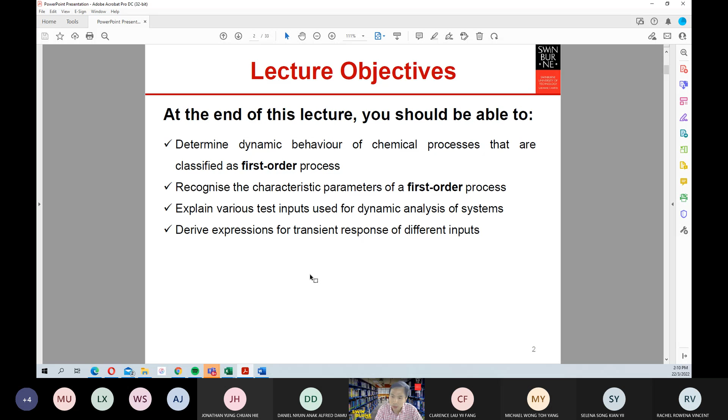We will also overview the various test inputs that are used for the dynamic analysis of the systems. And then we will also derive the expression for the transient response of different inputs.

So a first order system is a process whose output is modeled by a first order differential equation. Imagine you have a process, you have an input, and the input here is a function in terms of the change with time - it varies with time, that's why we label it as f(t). The output here is y(t), because we discussed in the last week about the single input, single output as well.

Now let the dynamic model of this process be represented by a first order ODE given below in the deviation variable form. Why do we use a deviation variable? Because if we use a deviation variable, it will make our life easy, since at time t equals 0, the deviations will be 0 - because we assume that at time t equals 0, the value of the variable of interest will be at steady state.

Okay, so in here you see in equation 1, we can break down into two cases: where a naught is equal to 0 and where a naught is not equal to 0. So let's say for the first one, a naught is not equal to 0, what will we do in here? What we do is we can rearrange. When we rearrange, this constant in here can be taken as equal to the time constant of the process, whereas this one will be equal to the steady state gain.

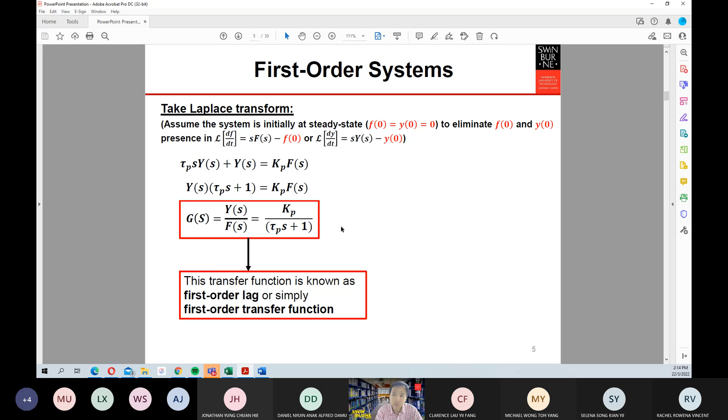For the second case, when a naught is equal to 0, that will be simple, because once you set this thing equal to 0, then you will only have this term and this term in here. That means these things can be represented physically in terms of the steady state gain. Then you can solve it again in a similar way. You can use a Laplace transform, and you will get another transfer function. So the transfer function that you have for the case of a naught not equal to 0 is different from the transfer function when a naught is equal to 0.

Now we go into the example. So if we have these things in here, we want to infer what is the process gain and the time constant of the process. So you want to make this in terms of this form in here. So you need to divide the numerator and the denominator by 4. So here you have this equal to this term in here. So you know that your Kp is equal to minus 0.5 and your time constant is equal to 5.5.

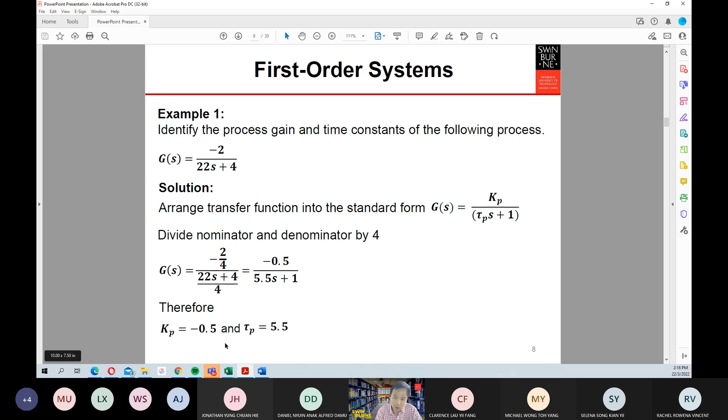Okay, so this one is just an easy example. If we have this kind of transfer function, and we want to know what the steady state gain is, and what the time constant is for that particular first order process, then we need to equate this form with respect to this form to get the value of the steady state gain and the value of the time constant.

Now, more importantly, in chemical engineering, process control is not something that is new. Process control has been developed since 1980, so it's about 30 or 40 years. So everything that people know about process control has been established.

Okay, so the reason that we go into this first order process is because we want to look back into which chemical engineering processes belong to the first order process, so that we know how to relate all the models that we develop in here, and what the characteristic nature of that is. Is it a self-controlling process, or do we need additional control systems to regulate the first order systems? So for the first order system, there are two important characteristics.

The first important characteristic is the capacity to store material, energy, or momentum. And then we also have the resistance associated with the flow of mass, energy, or momentum in reaching the capacity.

So the examples here are the dynamic response of the tanks. If that is a liquid storage tank, it will have the capacity to store liquids or also gases. The resistance, on the other hand, is associated with the pump, valve, weirs, pipes that are attached to the inflow or outflow of the liquids or gases.

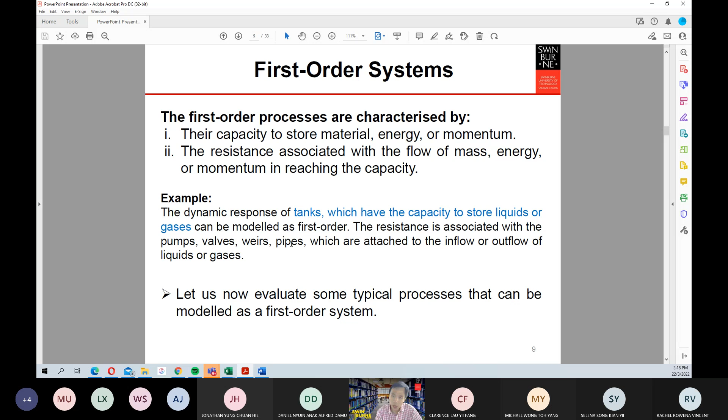At this particular point, it may not be clear to you yet what I meant, so that's why we have to go into the example to explain the significance of this. In this particular example, we are dealing with the mass storage tank with the capacity for mass storage. So you see this kind of systems.

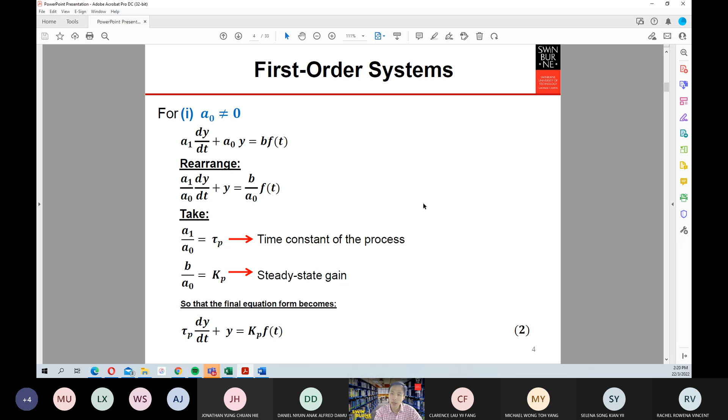...you can define this A/R is equal to the time constant of the process, and the Kp is equal to R. This is with regard to these derivations that we deal with the problem where A naught is not equal to 0. So basically you convert this A1 divided by A0, which in this case is basically A R, and this B divided by A naught into the steady state gain. So it's just going back into inspections of your mathematical form.

If you take a Laplace transform, you will be able to get this typical form again, the same form here, with the special note that your Kp here is equal to R, and your time constant, which is the tau p here, is equal to AR.

Then, the thing that you can do by inspecting your equations is that the cross-sectional area here is a measure of the capacity to store the mass. Why? Because the larger the cross-section of your tank, the more liquid you can store within your tank. And since your time constant of the process is A multiplied by R, we can say that the time constant here has a relationship in terms of the storage capacity multiplied by the resistance to flow.

This is basically more important than deriving all these things: that you take some time, you reflect back on the mathematical model, you check back how you connect those mathematical models in terms of the physical significance. So it's very important that you look back into the physics of the system. That's why when we go into chemical engineering, we are dealing a lot with mathematical and physical concepts. We only use a superficial concept of chemistry in chemical engineering, actually.

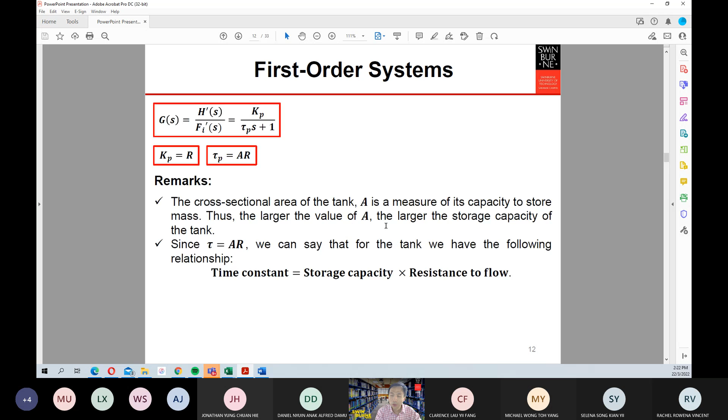The first example we just discussed was about liquid storage. Now we are talking about energy storage. Let's imagine we have this kind of tank. The liquid in the tank is heated by saturated steam, which flows through a coil immersed in the liquid, so there is heat transfer between the coil and the liquid. This tank is also a stirred tank.

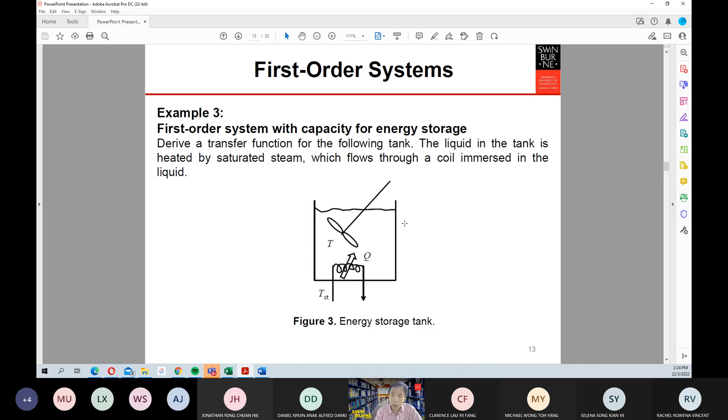And then the heat provided by the coil here can be given in terms of these things, and then TST here defines the temperature of the steam. This is basically the overall heat transfer coefficient, and the area of the heat transfer is AT here. So if we derive these things, we can get these equations.

Now we take the value at steady state. We change this value of T into the steady state value. This TS, TST becomes TST at steady state, T becomes T at steady state. This subtracted by this, we get these deviation variables. Then we move these two terms into the denominator of this term, and then we move this into the left hand side.

Then we define the two variables. These things here will be equal to the time constant of the process, and then we can also find out that Kp will be equal to 1.

Next, what we did is we take a Laplace transform. Then we know that we can also infer again the case where our time constant will be equal to density multiplied by the volume multiplied by the heat capacity at constant pressure, divided by the overall heat transfer coefficient multiplied by the area of heat transfer, whereas Kp will be equal to 1.

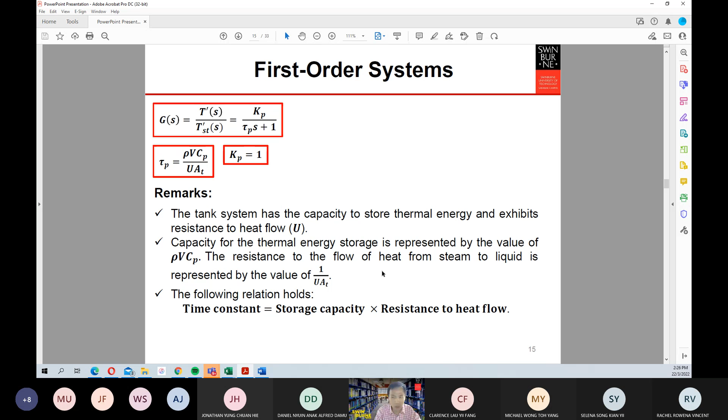The previous cases that we dealt with were dealing with the case where A naught is not equal to 0. Now, the next example, we'll talk about the pure capacitive system.

Instead of the thing we discussed earlier, we derive example 2 with one difference. The effluent flow rate is determined by a constant displacement pump, meaning the flow rate here is constant because we can adjust the flow rate using a pump. So no matter the conditions, we can define the flow rate of the pump to be constant. The flow rate taken out of this tank is constant because it's determined by the pump.

So if we take these things, the mass balance gives us this. You can see that at steady state, this H will be HS, Fi will be Fis, but Fo will be constant because we use a pump here, meaning there should be no variations in terms of the flow rate.

Therefore, if you use a deviation variable, this minus this will be equal to 0. Minus this plus this equals 0. So you have these things, which you can define as Kp. Kp is equal to 1 over A. Then you get dH over dt equals Kp Fi.

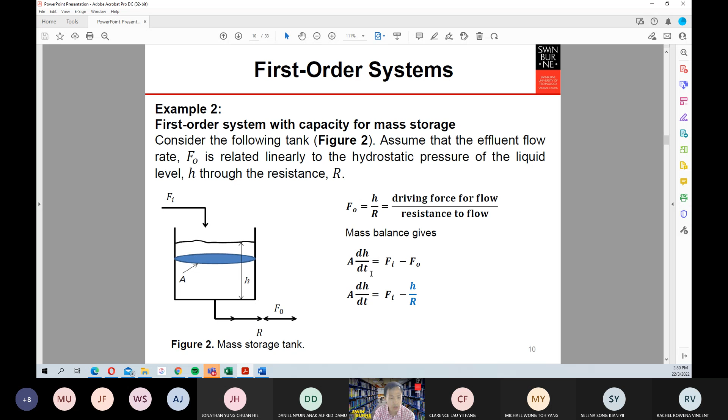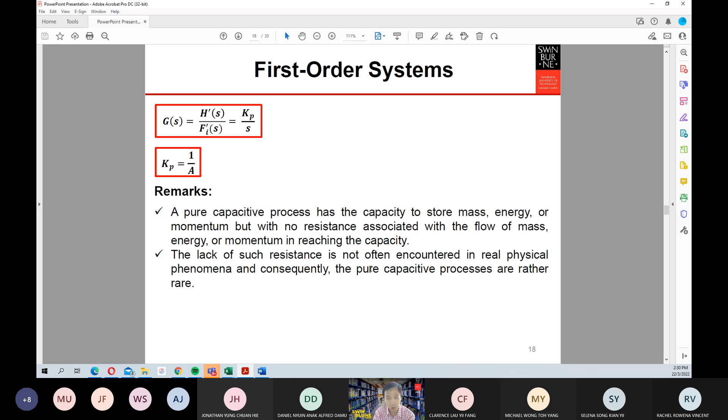So we will have consequences with the pure capacitive process in terms of the control that we will discuss in the following slides.

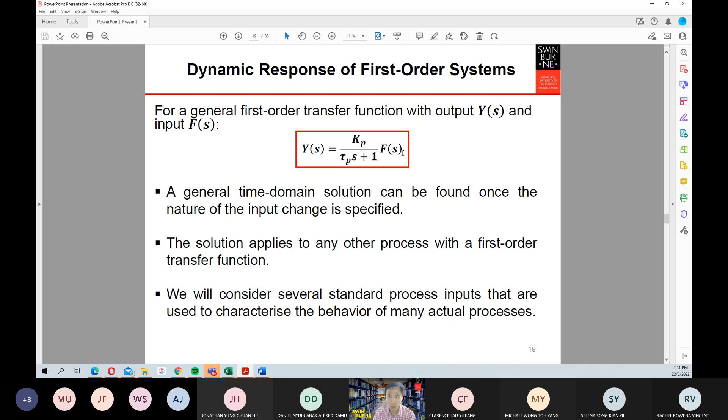Now we know that for a first order transfer function, this is the output, this is the input, and this is the transfer function, represented in terms of the Laplace domain. The general time domain solution can be found once the nature of the input change is specified. The solution applies to any other process with a first order transfer function. What we want to do here is overview several functions that you can use as input for checking the dynamic behavior of your system.

The first one here is the step input. So if we have a sudden change in a variable, it's initially 0, and then at time t equals 0, that value is increased to A. Then your input will have a form like this in Laplace form. We have a special case where if A equals 1, that means we have a unit step change.

The next one will be the ramp input. The ramp input is something that changes like this, increasing linearly with time. The example of the step input is something that exists in reality. For example, if a reactor feedstock is suddenly switched from one supply to another, that may cause a change in the feed concentration. That can also happen in terms of flow, and any other things such as temperature as well, that is possible.

The ramp input, on the other hand, means you increase the value proportionally with time. We don't really have a limit here, but of course in reality this will not be possible, so you may have a limit. In reality, what you will have for the ramp input is something like a heat exchanger fouling, loss in catalytic activity, or exposure to ambient temperature.

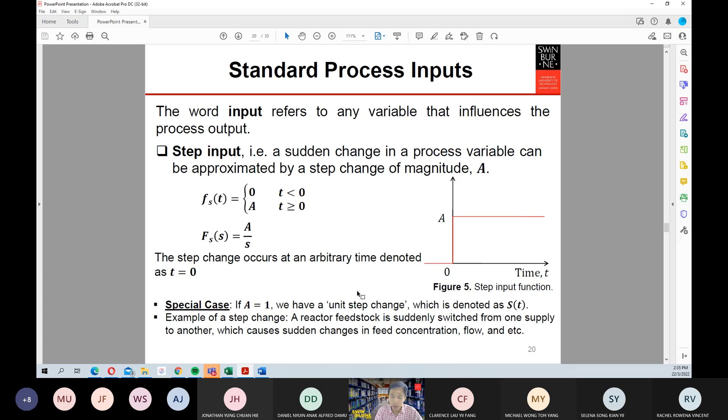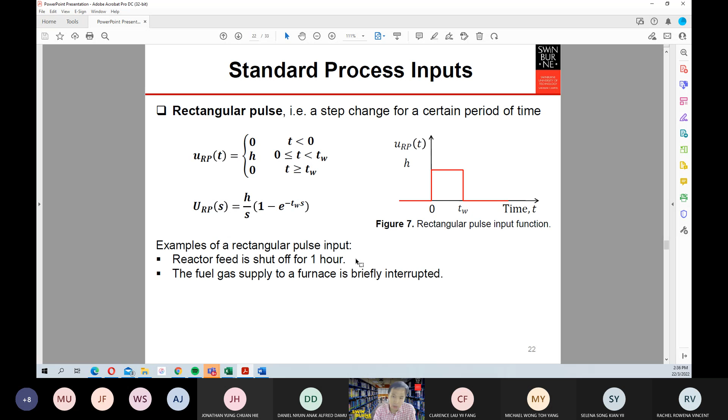What is important is that all these process inputs are used to represent disturbances to a dynamic system. For example, the step input can be used to simulate a change in the reactor feedstock. It can also simulate a heat exchanger fouling or loss in catalyst activity, or a disturbance such as an interruption of the fuel gas supply for a brief period of time. It can represent variations in cooling water temperature, or, as a special case, injections of a tracer dye.

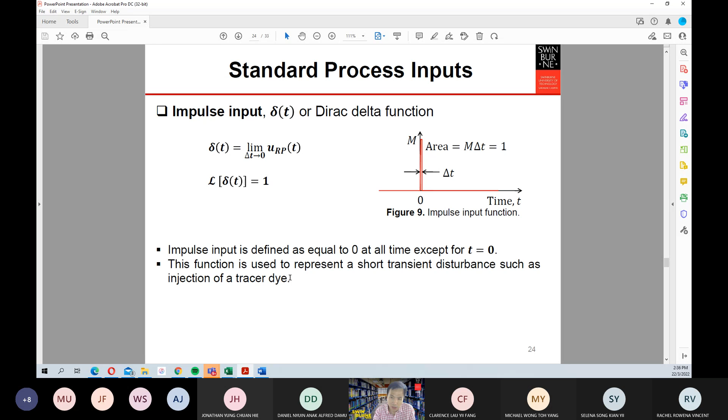Now you will ask me, sir, why do you need to bother with these different test inputs? Because what you need to get is the dynamic response if you have a first order transfer function coupled with a particular input.

Let's look at this first order transfer function, and assume we have a step change in the input of magnitude A. So your transfer function will have this form. In the Laplace domain it will be this, and you can get the dynamic output of your first order process by multiplying it with your step input. So if you multiply this, that will be A divided by S, giving you this expression.

If you take this Laplace transform and invert it back again, you get the time domain solution: Y(t) equals KA times 1 minus e raised to minus t divided by the time constant.

Now you want to plot the system's response. For this step input, how does your output behave? The output will behave such that it has a magnitude of KA. If you divide Y(t) by KA, you get a normalized plot. There is a large change in the beginning, but once t divided by the time constant goes above 3, the change becomes quite marginal.

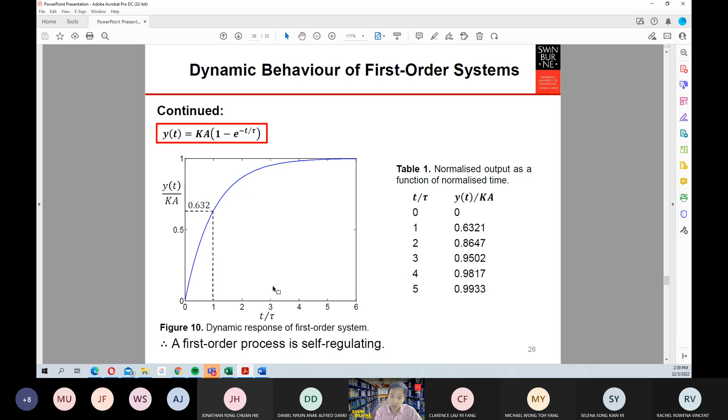What can we infer from this system is that the shape of the curve is monotonic, with the maximum rate of change occurring right when the step change takes place. The manner in which the variable changes from its initial to final value is influenced by the time constant, which is why we use t divided by tau, what we call dimensionless time, and Y divided by KA, the dimensionless output.

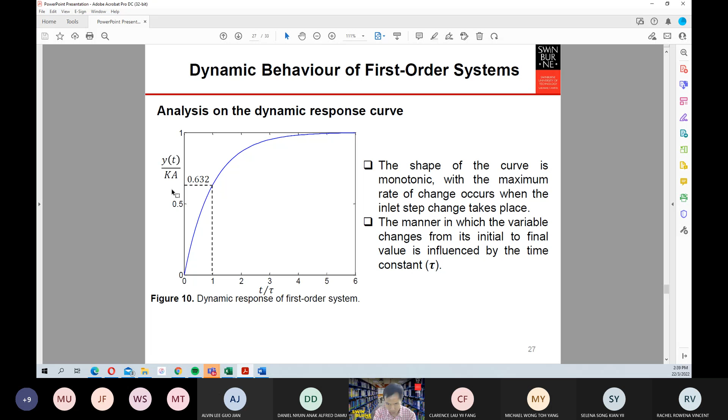Then we go into another example. Example 6 is the dynamic model of a certain process in deviation variable form.

This one is an output variable, M here is defined as the manipulated variable, D is disturbance, T is time. We are asked to determine the transfer function of the process, determine the time constants and steady state gain of the process, analyze the response of the process if the manipulated variable increases by 2.5 and is maintained there, and determine the time the process takes to reach 99.3% of the new steady state value.

We go with the first one first. We apply a Laplace transform into the left-hand side and the right-hand side. Then we rearrange, because we have a manipulated variable and a disturbance variable, meaning we have two different transfer functions. We want to make it in the form of the first order transfer function, so we divide the numerator and the denominator by 2, then we get this.

Therefore, your transfer function with respect to the manipulated variable will be this. The transfer function with respect to the disturbance variable will be this. The time constants are the same for both correlations with the manipulated and disturbance variables, it will be 3.6. But the steady state gain with respect to the manipulated and with respect to the disturbance variable will be different.

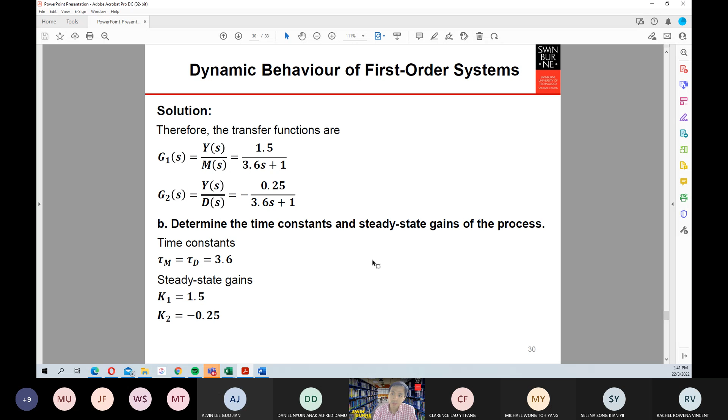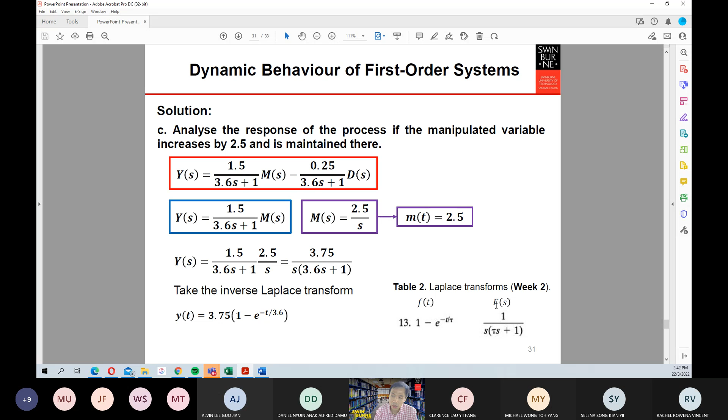Next, we want to analyze the response of the process if the manipulated variable increases by 2.5, so that will be a step input by 2.5 times. If you check these things, you apply Laplace transform, you will get this one. The problem specifies the manipulated variable increases by 2.5, so you will get these things. Then you put in the Laplace transform, you will get this one again, coming from table 2 in your week 2 lecture.

The last question deals with determining the time the process takes to reach 99.3% of the new steady state value. So you put in 0.993, this equal to this. You apply logarithm to change this form into this form. Then we know that we need about 18 minutes for the process to achieve 99.3% of the new steady state value.

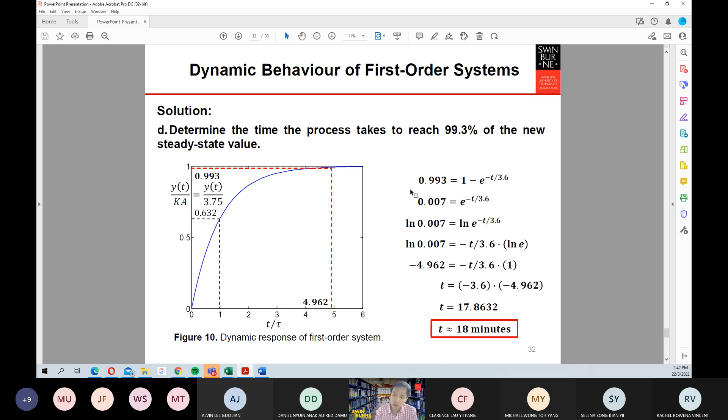So, concluding everything that we discussed so far, the two constants that characterize a first order system are the time constant of the process, which is tau p, and the steady state gain kp. The time constant tau p is a measure of how long a process takes to adjust itself to the new value of an input, whereas kp indicates the size of the change in the steady state value of an output due to a unit input. So we are dealing with this case for a first order process where A0 is not equal to 0.

We have a second case where A0 is equal to 0. This will be a purely capacitive process that arises from a process that has only capacity and no resistance to the flow of mass or energy in reaching the process. This is a self-regulating process, and this is a non-self-regulating process. So if we have this kind of thing, we may need to apply control systems to make sure that the purely capacitive process will not create a problem for us when it operates.

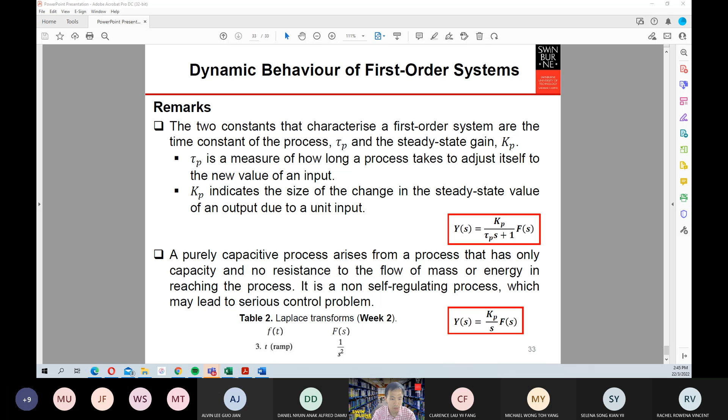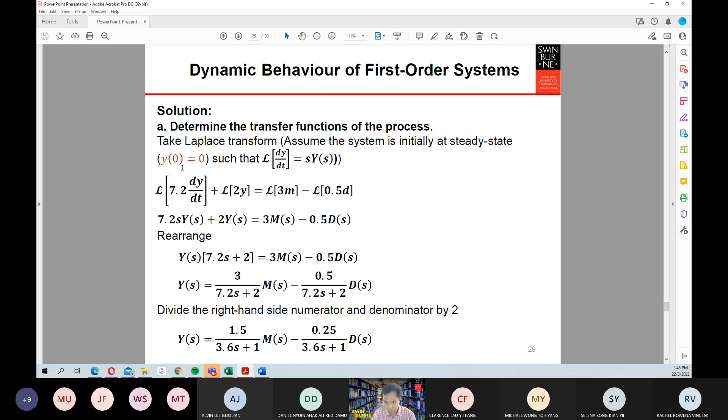Why not at the steady state? Which one is that, why not here? Because all of this is defined in terms of the deviation variables, you see. So this is why here, without putting the dash in here, it is at the steady state. So the deviation variables will be equal to 0 at time t equals 0 because there will be no deviations from the steady state. So the deviation with respect to the steady state is equal to 0, that's why this is all defined in terms of the deviation variable.

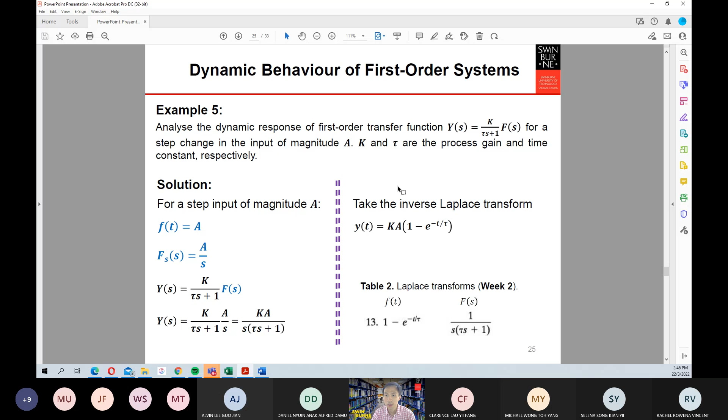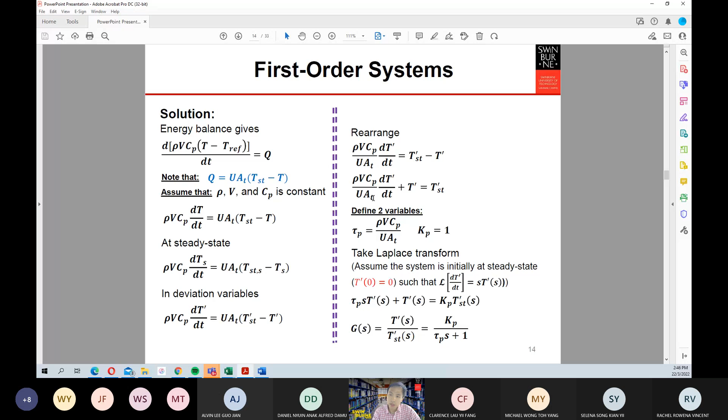So if you check, this one is the deviation variable. Everything here is basically deviation variables that we define from the beginning. Everything is the deviation, just for the sake of making your life simple by getting all these things to become zero at the steady state. This one is at steady state.

This is something we call a regulatory problem, where the disturbance is with respect to the steady state condition. If we are dealing with something like the servo problem, then it's different. The servo problem is where we basically control the trajectory of the system with time. Okay, you get what I meant, you see?

Or we can set up another time for us to speak in detail. If we meet face-to-face, then you can ask me why this is the case, because this variable in here is implying the...

Yeah, this, if you put it like in y dash, yeah, it is y dash, but because we already say that this is represented in terms of the deviation variable, then not all variables we need to define in terms of this y dash, right? So when we mention something about the deviations, then it's already clear to us that not every symbol in here we have to put in terms of the y dash.

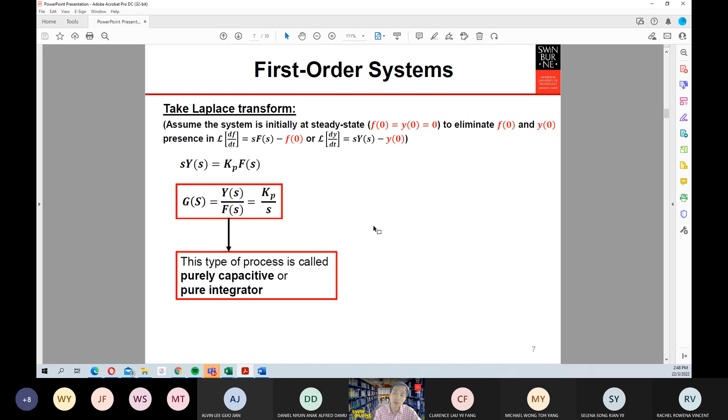Yes, correct, that's correct. It's just a problem of notations, I think. So sometimes it may be confusing a little bit in terms of the notations. But everything in here is defined pretty much in terms of the deviation variable, unless if it is defined otherwise.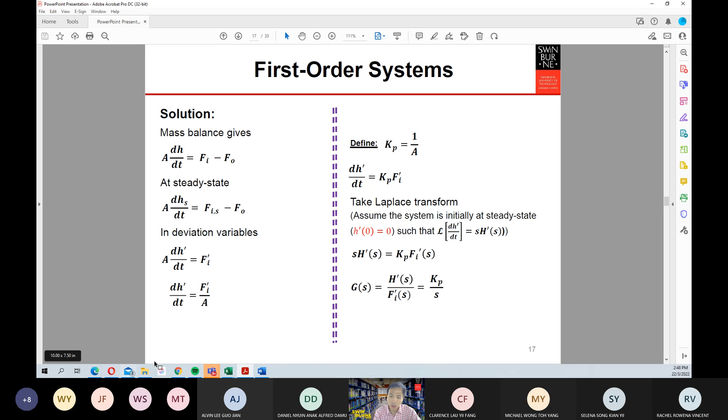So what else again that I want to show you? The MATLAB files for your project one. So Friday Frederick will go and talk again. For those of you also doing the process modeling as well, right?

So what you need to do, I know that the MATLAB online has been working, so for your process modeling, make sure that you put everything into the same folder. For example, this one is the project 45. I have this project 45, and I have a lot of folders where I put different projects for checking your process modeling.

So let's say I open this one. You need to put all the MATLAB files into the same folder. Let me try opening this one, for example. The problem associated with this access issue is because we are renewing the license.

So we get it done. So we open this one, the getf.m. And then we open this ivp_RK4_control. And then we open this LLDC driver.m. So what happens in here is you open these three things at the same time, right?

In order for you to run these things, then you just click in here, you run. It may take some time because MATLAB Online is probably a bit slow.

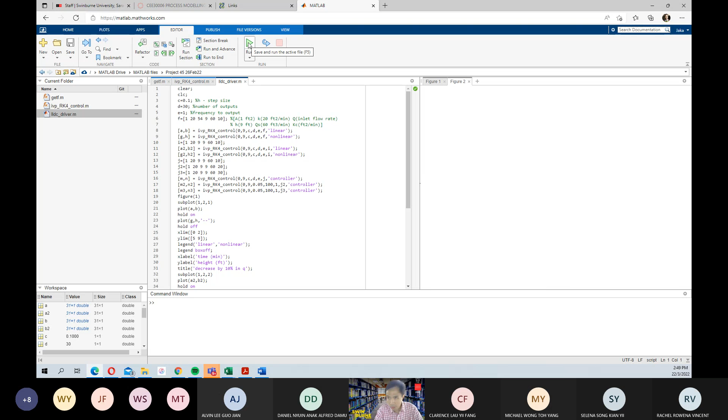So this is figure one. Figure one is basically comparing the linear model with the nonlinear model. If you have a decrease of 10% in Q, this one is 85% in Q in terms of the flow rate. Then this figure 2 is basically giving you the response if you run it with the proportional controller.

So what essentially, why you need to open these three code at the same time: this one is the one that you run because this LLDC driver is the one that will call these things in here. So this will call this function in here to calculate the value of A and B, and then after that it will also calculate the value of G and H as well, depending on what you are putting into these things in here.

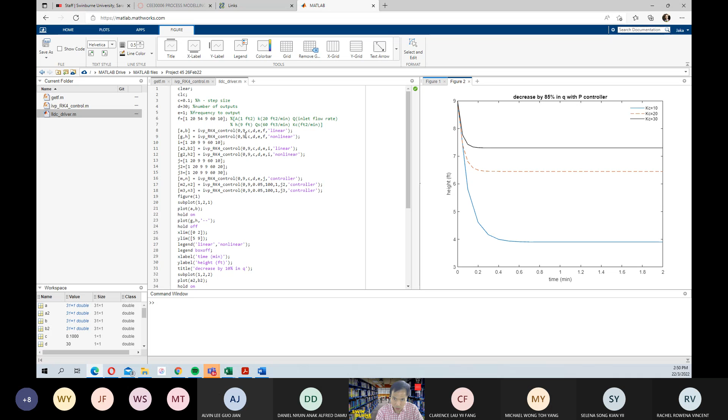This ivp_RK4_control will call this getF in here. So that's why you need different functions, because everything is interrelated with each other. And then this LLDC driver will be the one that plots the results in here. Whatever the matrix you have in here, it will be plotted by these things in here.

I think you can also access the MATLAB online for your process control as well, at the same time that I have shown to you before.